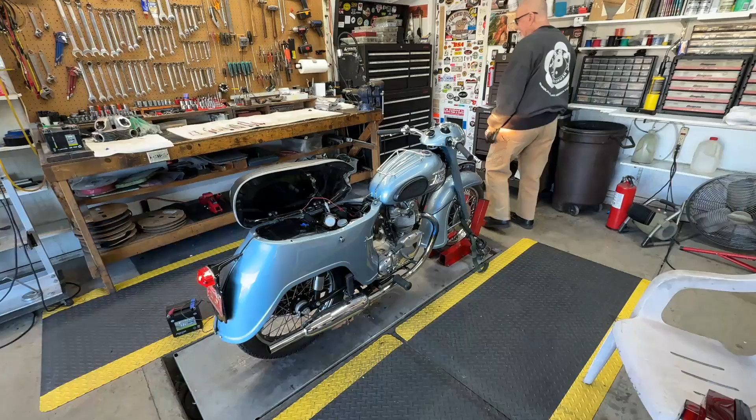Started right up. Tail light, hit the brake. Not high beam, low beam. Horn. Ammeter is a 6-volt ammeter with a 12-volt system, with reading really high. If you watch the flare on the wall, you'll see it flare when I rev up the engine.

Showing that it is charging. It's ready for a road test as soon as we get a new battery. Sounds really good. Got good oil flow, we checked it. It's a sweet little bike. As soon as we get a battery, we'll let the client grab it.

All right, so it sounds good. Good oil flow, we checked it. Started right up, second or third kick. And good idle. It's throwing a charge. You can see the flare on the wall when I revved up the engine. The ammeter is a 6-volt ammeter and a 12-volt bike, so it's deflecting all the way over to the plus side. And brake light works, tail light works, high beam, low beam works, horn works. It's ready to go back to the client as soon as we get the battery in, hopefully in the next day or so, and do a test ride around the block. Let's see how it runs. Cool.

So we ran and started the bike and got a video a few minutes ago, about half an hour ago actually, and it started about the third kick. I wish I'd videoed the start, but I didn't. Frankly, Kevin was just getting ready to start it and went ahead and started it. So it started, revved up, idle, sounded great. We turned it off, and we'd been talking about different things we're going to do here in the shop, and our neighbor came over, Richard, and we decided to start it up again, showing him the bike as it ran. It wouldn't start. We kicked on it about 25 times.

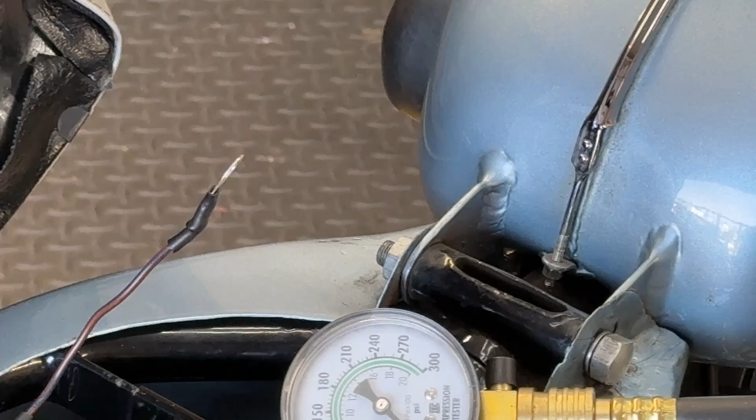We got 120 on this side, so 90 to 120, that's quite a bit of difference. I wanted to do that because this pipe is quite blue, and we might have a burnt valve there. So we've got 120 on this side. Let's do this side again, a double check. Set that up in there. Let's bring you over closer and zoom in.

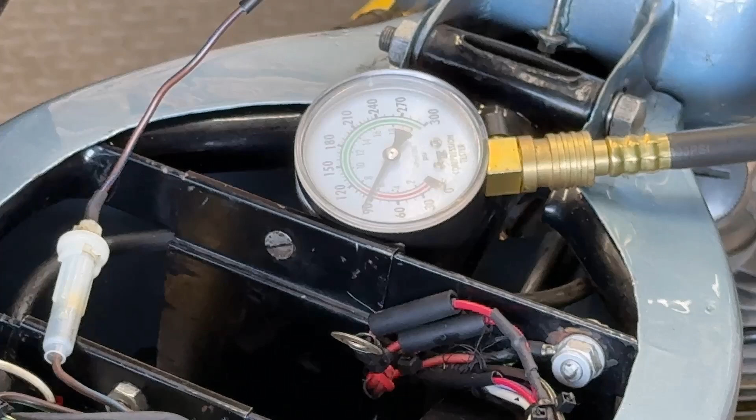See if I can do this without getting in the way. All right, so we're still running. Throttle wide open. Yeah, it's really topped out at 90 pounds on this side. I'm going to put the bike up in the air and check the valve clearances.

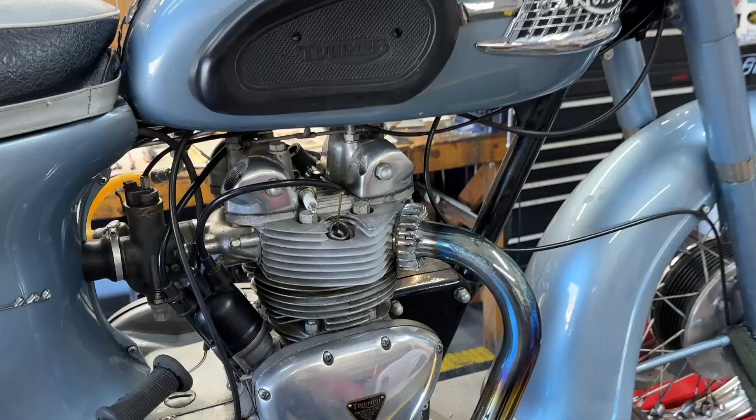There may be more to this problem than meets the eye. Well guys, I said I'm having a hard time starting this thing, and I noticed that this pipe is kind of blue, and so I put a compression check on it and found that this side only had 90 pounds while the other side had 120. So I decided to check the valve clearances, and I checked them. They're perfect, 2 and 4.

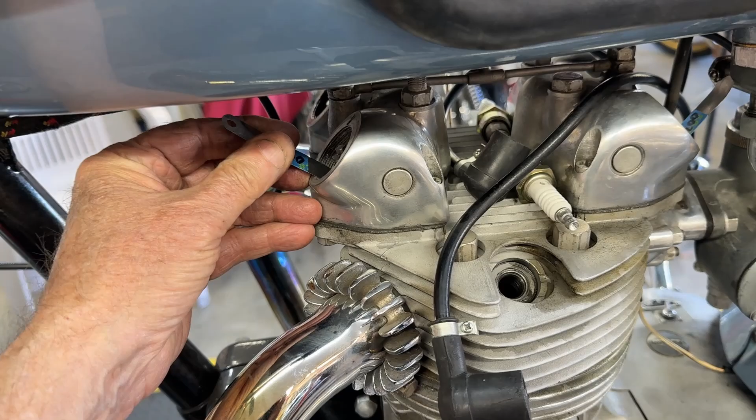This side actually has these feeler gauges in it. That's 2, and that's a nice snug 4. I'm sorry, this exhaust is a nice snug 4, and this is the intake, it's a nice snug 2. And I said to myself, gosh, those are perfect. Of course, this is a 350, not a 500. I don't work on a lot of 350s, and it's a 3TA, so I better check the book.

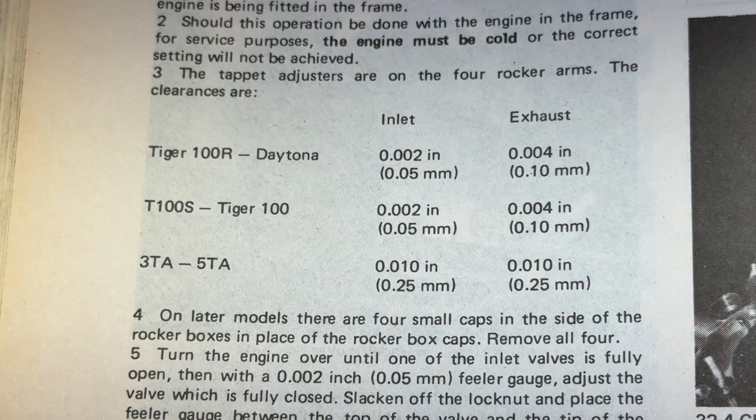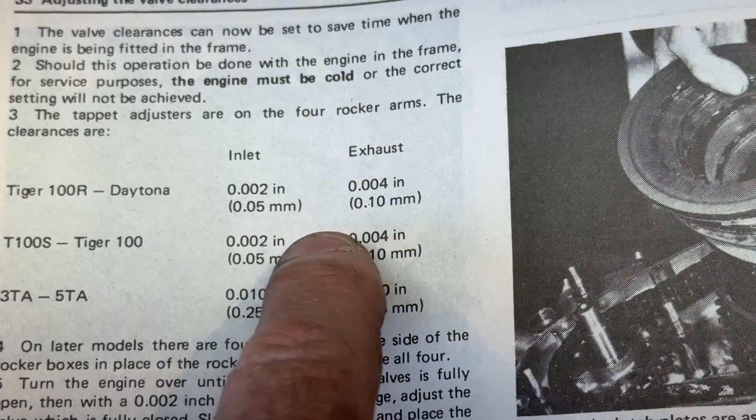So I got the book out, and let me show you here. I'm just going to zoom in right here, and it says inlet and exhaust valve clearances, 3TA: 10 thousandths and 10 thousandths, not 2 and 4 like every other Triumph. 10 thousandths and 10 thousandths. So these valves on this bike are way too tight.

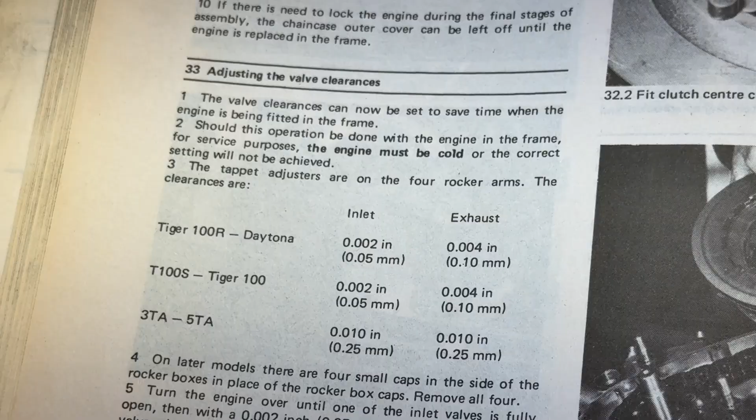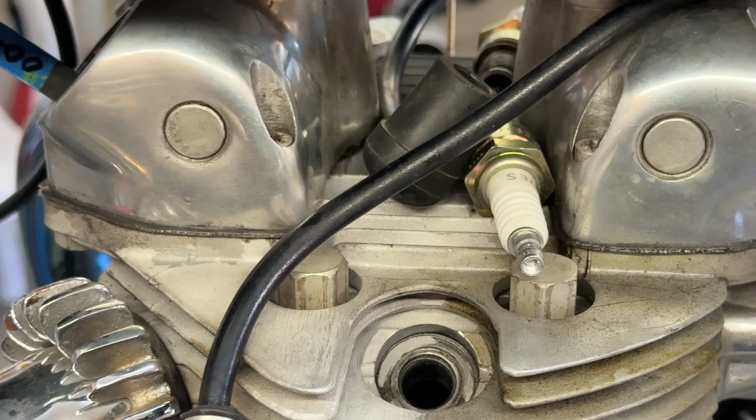We may have burned a valve on the other side, which is why you have low compression. So I'm going to set these to 10 and 10 on each side. That's what I'm running on my 500, by the way, because I have a hot cam in it. So this guy needs 10 and 10.

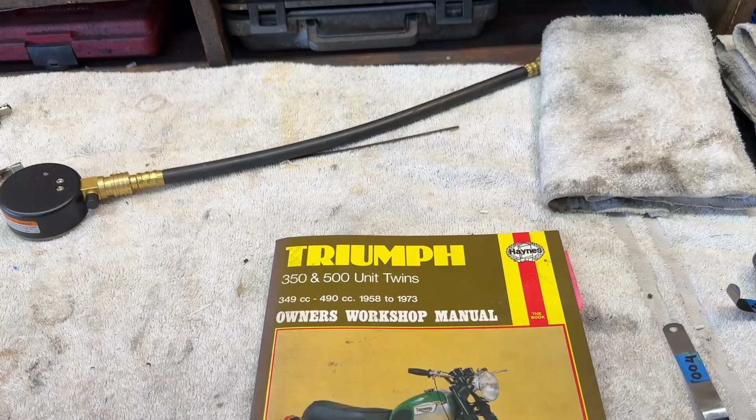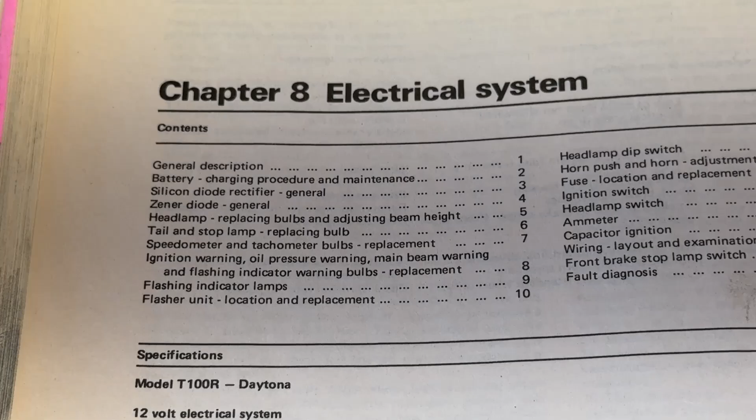I'm going to readjust these, and then I'll try another start. You know, as long as I've got the manual out—this is the Triumph 350 and 500 unit twins—while I've got it out, I thought I'd show you something else here. Chapter 8, electrical system, down here.

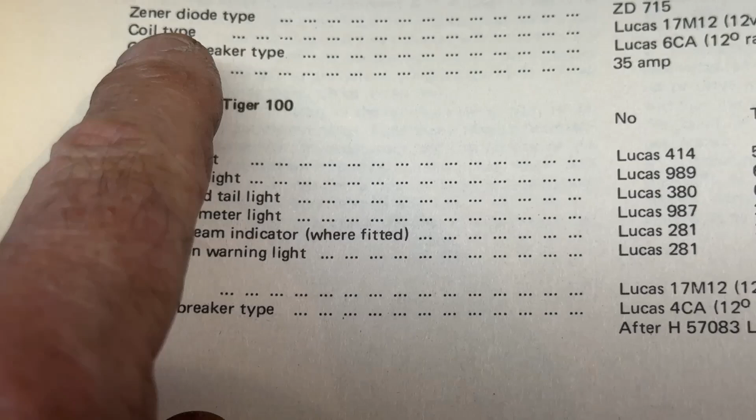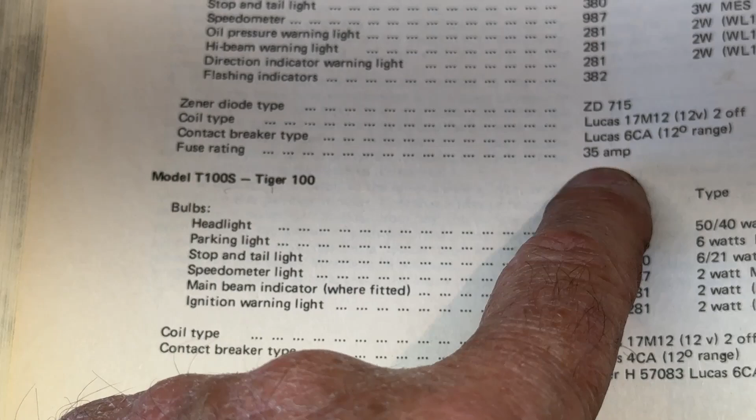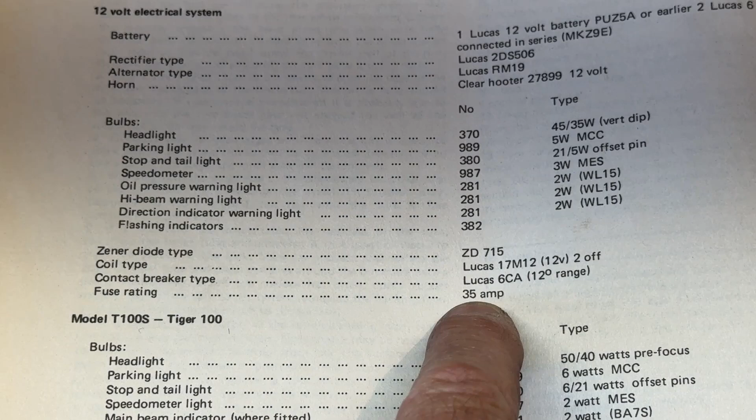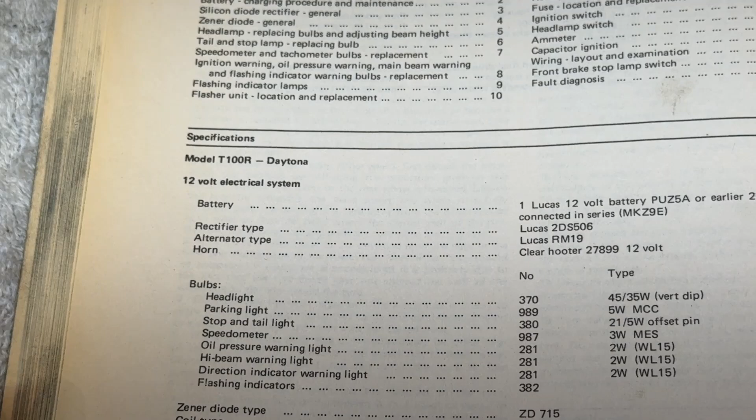And fuse rating right there: 35 amps. That's so wrong. That's a Lucas 35 amp, which is actually a 17 amp, which is why putting an American 35 amp fuse in there is way too big. An American 10 amp fuse is all you really need. So once again, fuse rating 35 amp—what they really mean is a Lucas 35 amp, which in actuality is a 17 amp fuse. So if you want to run a 15 or a 10 in an American bike, 10 or 15 amps is more than adequate. You don't want to go to 35 amp, it's way too big for these bikes.

Okay, so this is a nasty thing to say: it's a Lucas 35 amp, which is actually 17 amps.

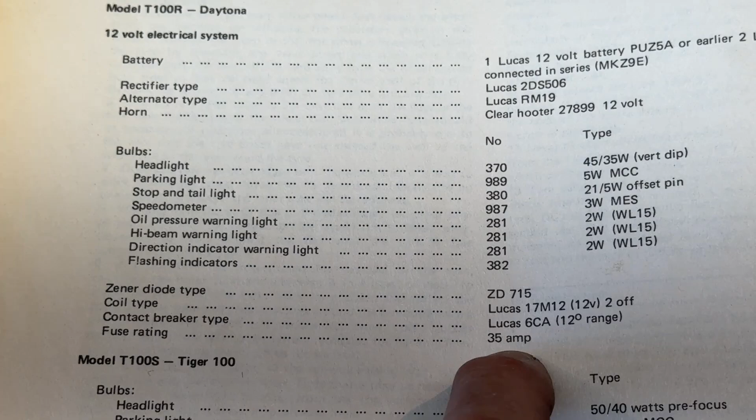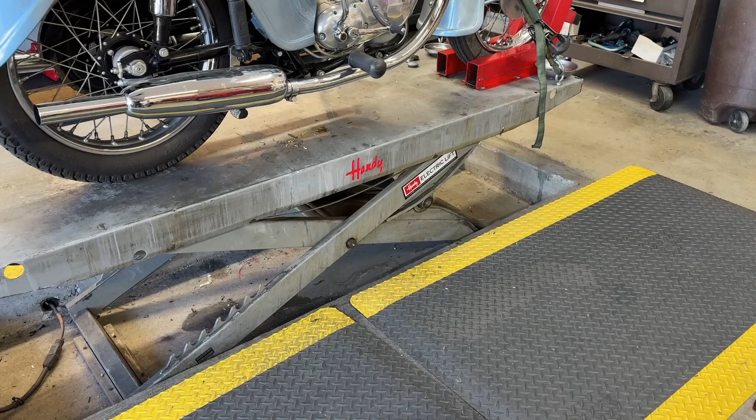So let's go back to doing 10 and 10 on the valves. All right, I adjusted the valves to 10 and check again. The one we're primarily interested in is this right-hand side, to see if we can increase the compression at all. It was 90 pounds, the other side was fine. Let's see if this side has damaged valves, or if just loosening the valves will get us better compression.

All right, let's just tuck that up somewhere safe. We'll give it 10, 12 good kicks with the throttle wide open and see what we get.

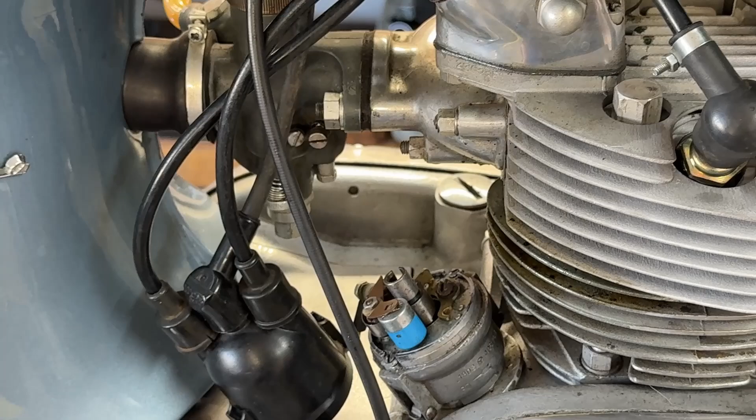Distributor. Not your best friend, girlfriend, second cousin's next door neighbor, but you yourself. Have you yourself any experience with the distributor?

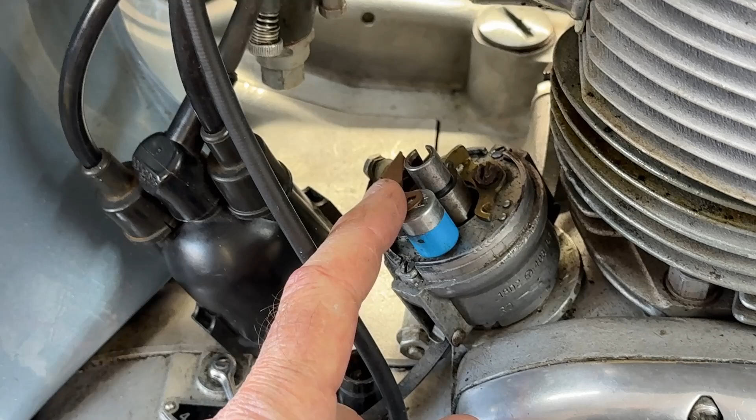The fact that it's got a nice capacitor here, that would probably be maybe a 6-volt capacitor. Would it matter? My opinion and my good friends say no, that shouldn't matter.

Capacitor, condenser, it's the same, two names, same thing. It just cuts down the arcing on the points. The points themselves are beautiful.

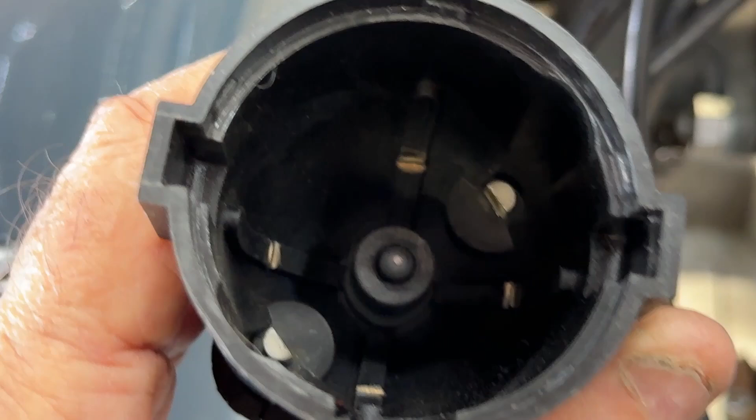I took a look at them. They're nice and clean and shiny bright. They look new. This cap looks like it's brand new. It's nice and clean. Nothing inside that would attract my attention. Just lovely.

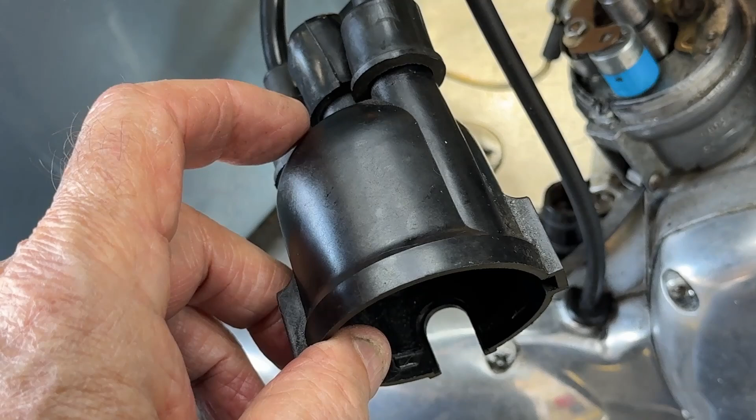So, the one thing I notice when I hold the points open and with my other hand, taking the pressure off the cam, trying to rotate this to show the advance, it doesn't really want to move. There's no real, I can't—on the ones built into the timing cover, you can move this cam with the advance unit. Right now it's all I'm getting right there.

I don't know if that's enough. I'm very hesitant to take it apart. I don't want to pull this apart, take it out, look at the advance unit, all those different things. I don't want to mess up the timing.

And I'm not sure that I've been talking all this time. My earpiece just said connected. Okay, I just don't know. Get a little frustrated with this iPhone 16.

Anyway, if anybody out there has worked with this distributor system and can tell me about any idiosyncrasies, I'd be more than happy to entertain your input. But right now I'm going to let it sit overnight and do a cold start tomorrow morning. And that is all.